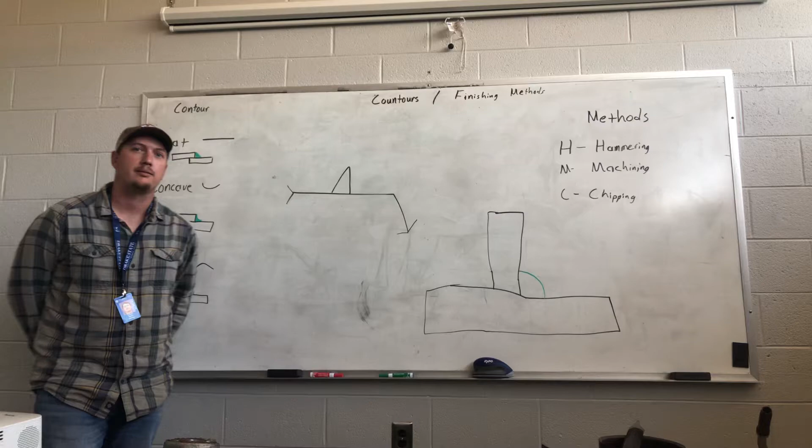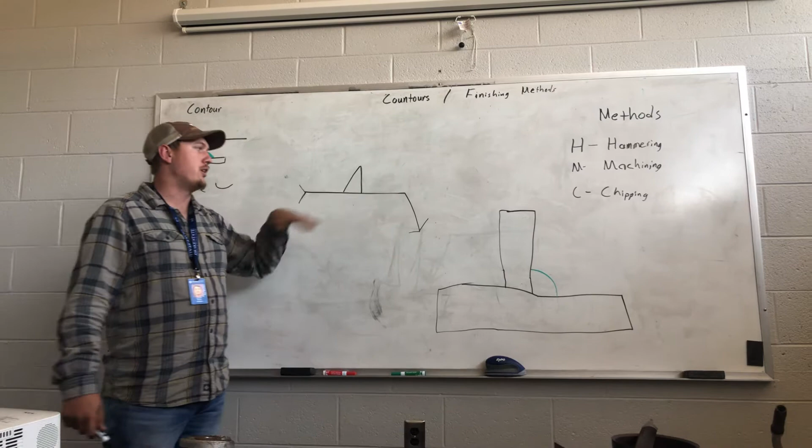Today we're going to talk about contours and finishing methods. To jump right in, we have a welding symbol here with a fillet weld symbol on top. Fillet weld is a prime example of when they would use a finishing method. It can be used with other types of welds, but a lot of times it's fillet weld.

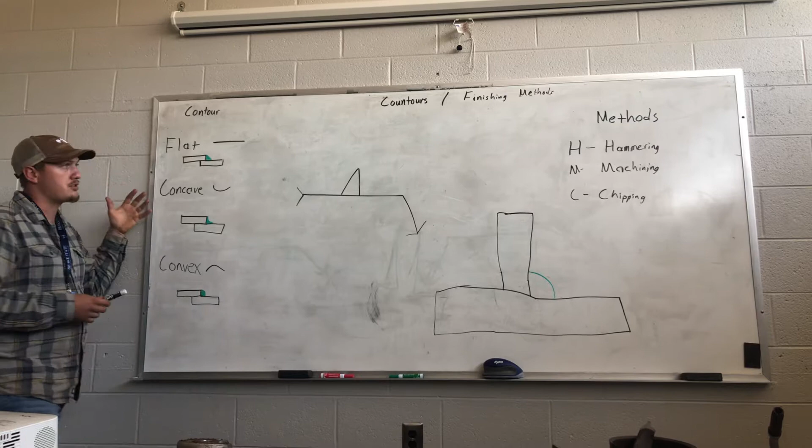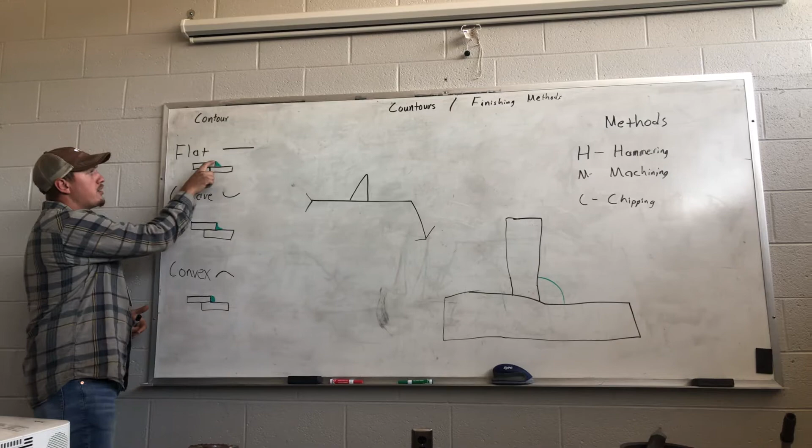Now there's three types of contours: flat, concave, and convex. Flat's pretty self-explanatory. When we get finished with a weld, you see we have a fillet weld here on a lap joint, that weld needs to be flat.

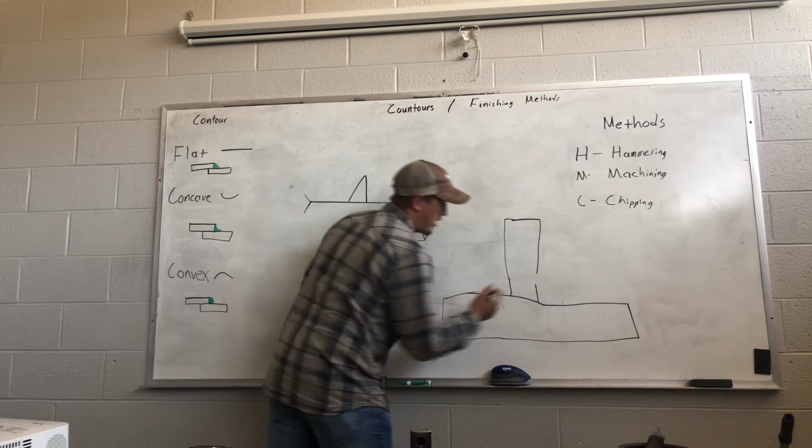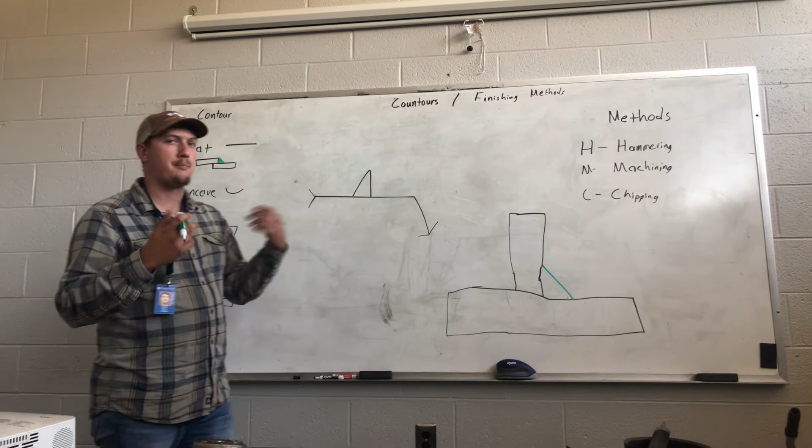To give you an idea what that would look like, on the bigger screen, we've got a common T-joint. When we make our weld, it needs to be flat all the way across there. Well, it's almost impossible to actually make a weld flat by just welding, so it's possible that we have a different finishing method on it.

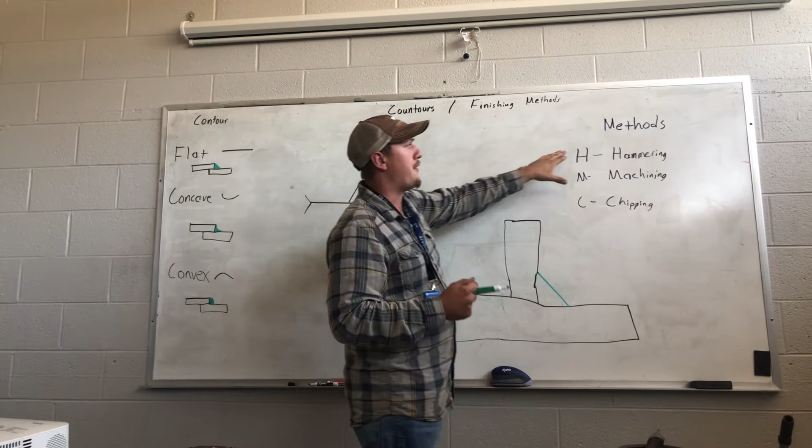So the types of methods we can have, for example, we can have hammering or machining, which would be a good one to make a flat weld. That means we welded it, and then now we take it to the machine shop, and those guys can machine that weld down. Chipping, there's also several different kinds.

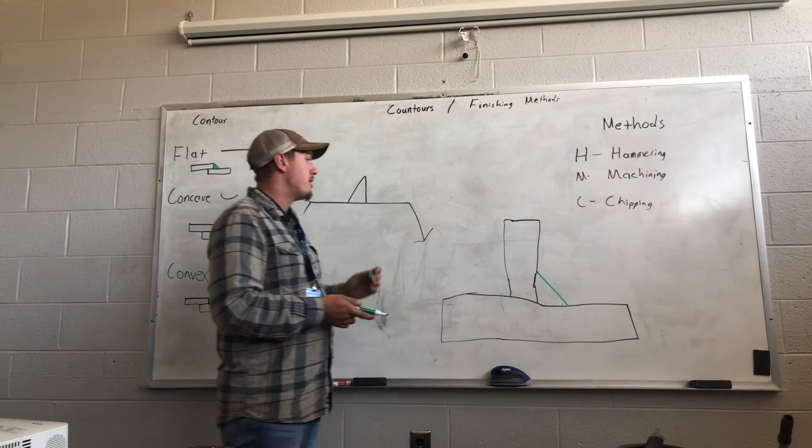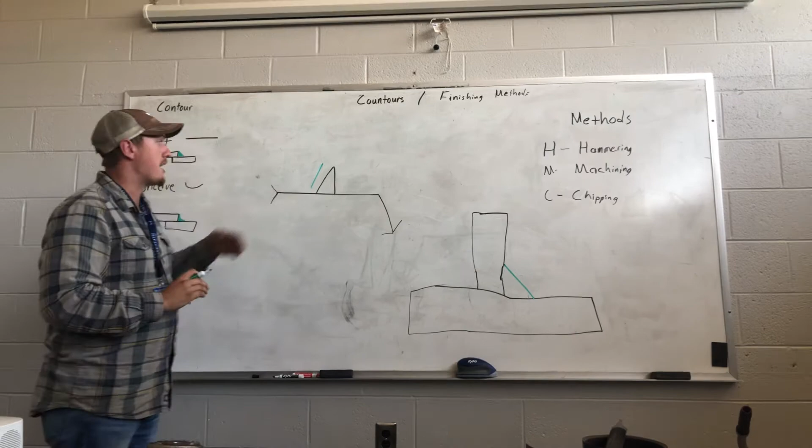How we can see this, we have a T-joint, flat weld. The finishing method would be made like that, giving us a flat symbol on there—just a straight line showing us this weld needs to be flat. Alright, so that's the flat.

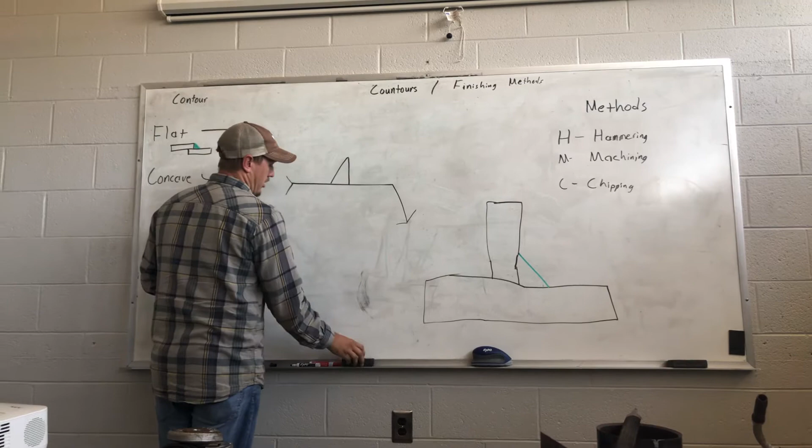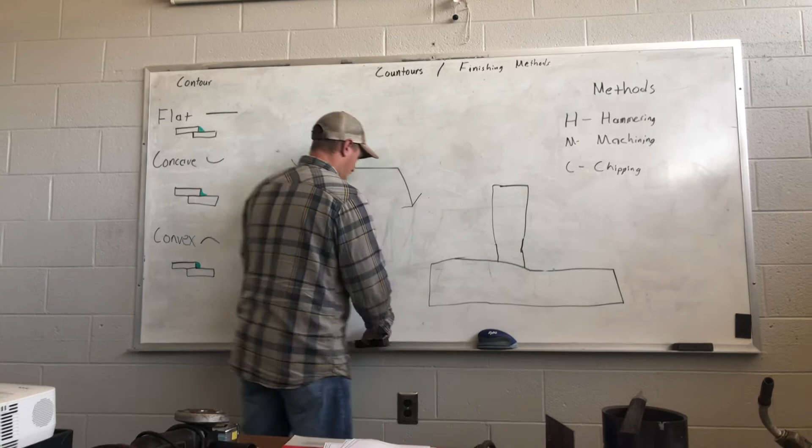We can also have concave. The concave contour would look like this—it's where it's sunk in a little bit. A good way to remember this: caves go in. So your weld would be concave, your weld would stick in a little bit.

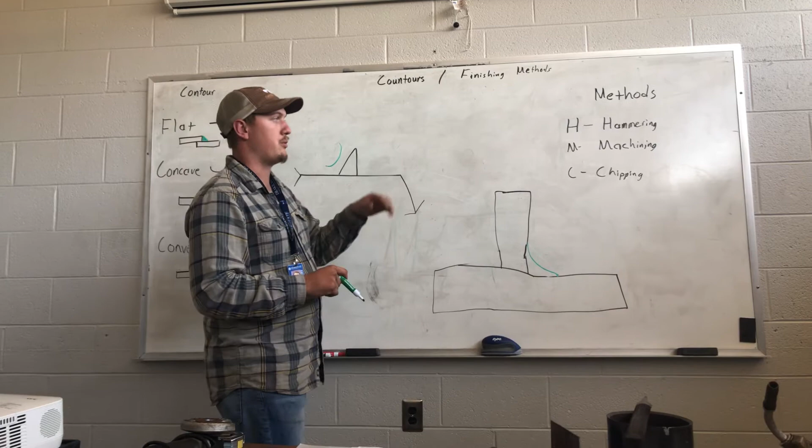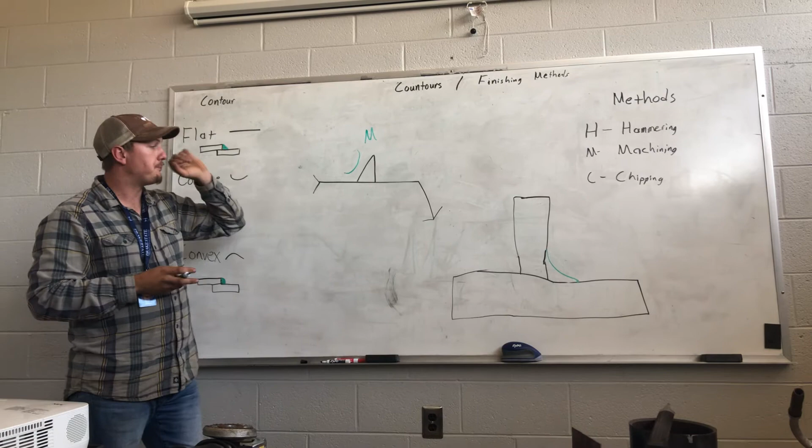Same thing, it's possible that we could have done that by just welding, but we might also have to have some help. So those finishing methods, how we would label those, is it might say something like just an M for machining on top of a fillet weld symbol. So it gave us a concave contour, so we knew it had to be concave, and we know it's going to have something else done to it.

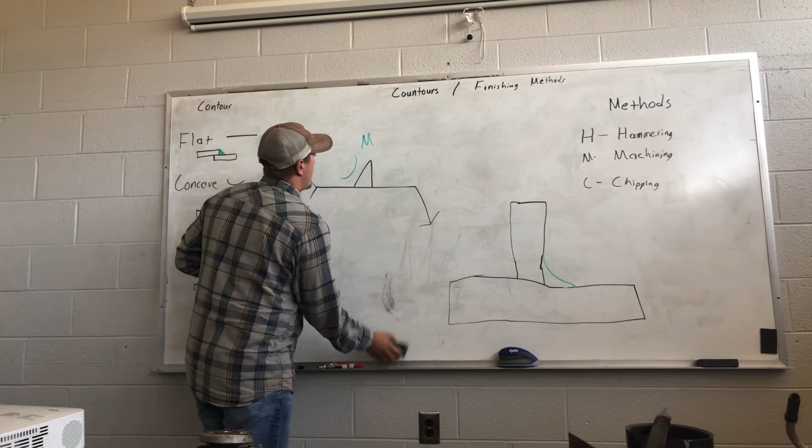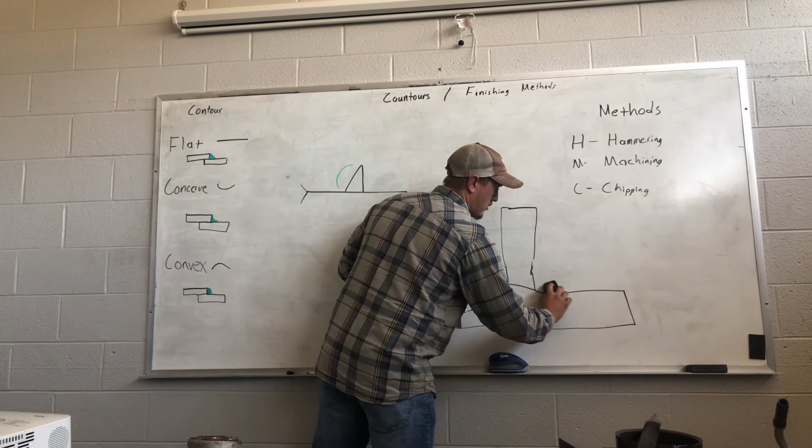We also have convex. Convex is the opposite of concave, it sticks out. And it's possible we make that weld by just welding it, so we can say that weld kind of sticks out a little bit.

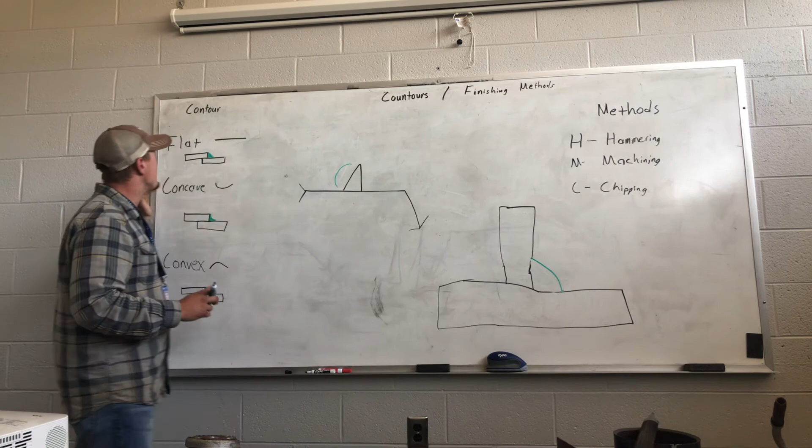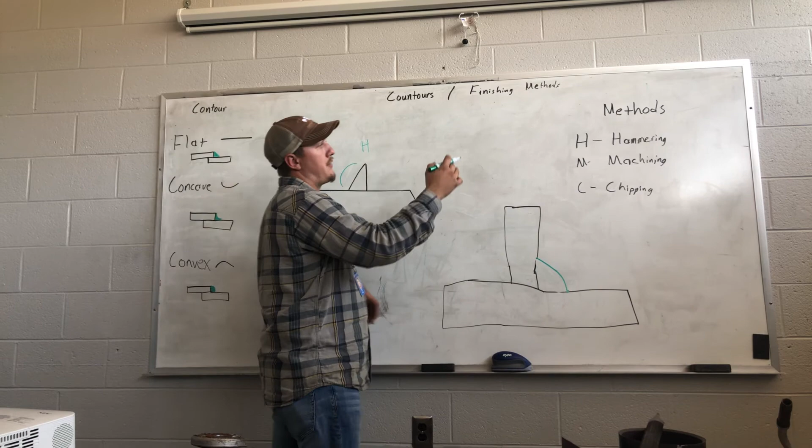So our three types of contours are flat, concave, and convex. And then we can have different finishing methods, labeled with letters—H for hammering, M for machining, C for chipping. You can have all kinds of different letters up there. Depending on where you work, they normally have their own lettering system.

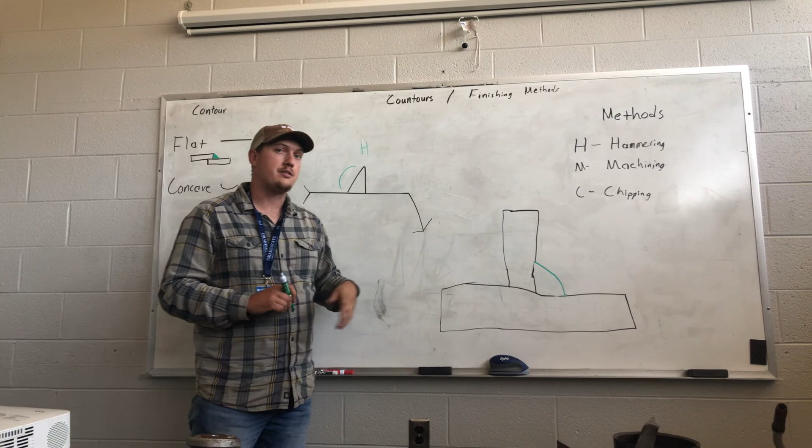And that's pretty basic. We can have these on fillet welds. It's possible to have them on different types of groove welds and stuff, but fillet welds, you're going to see these a lot. And that's pretty much it today for the contours and finishing methods.